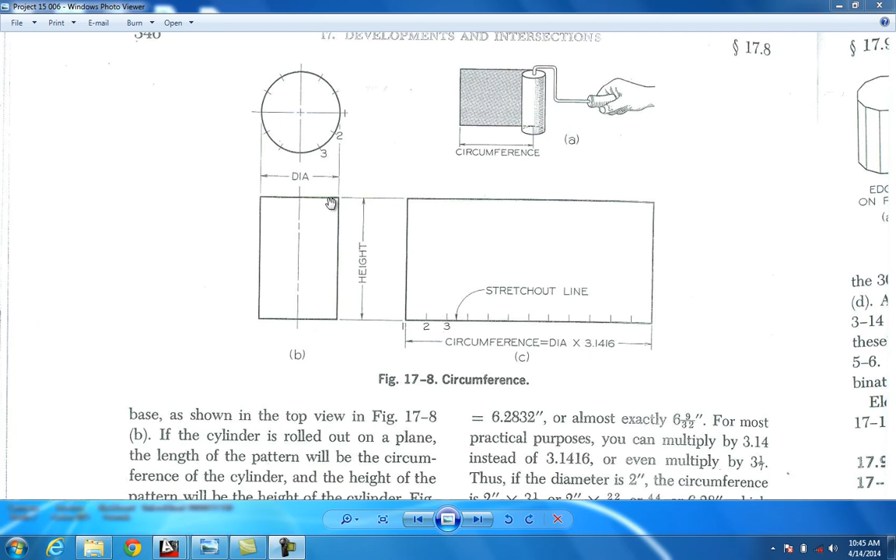But first I'd like for you to do your reading, on page 346. This is what I attached, the weekly task list, and I want you to open this up. There are several different pages to this, and I want you to read all of them because it's very helpful. Now our first project is going to deal with this little cylinder, and it's real simple.

This is the can, this is the top, this is the front side of it, and over here, for the right side, we're going to do a stretch out. When I do this in class, I always let the students print this out so they can actually roll it up and make it work, and see it turn into a can. It's pretty neat, but you can still do this wherever you're at if you have a printer. Let me show you how this is done.

The only thing you're doing is taking your diameter and timesing it by pi, and that gives you your circumference. So you want to know what the exact length of this circumference is all the way around, and that's what gives you your stretch out. So it's circumference equals diameter times 3.1416, which is pi. It gives you this length, and you're able to find that stretch out.

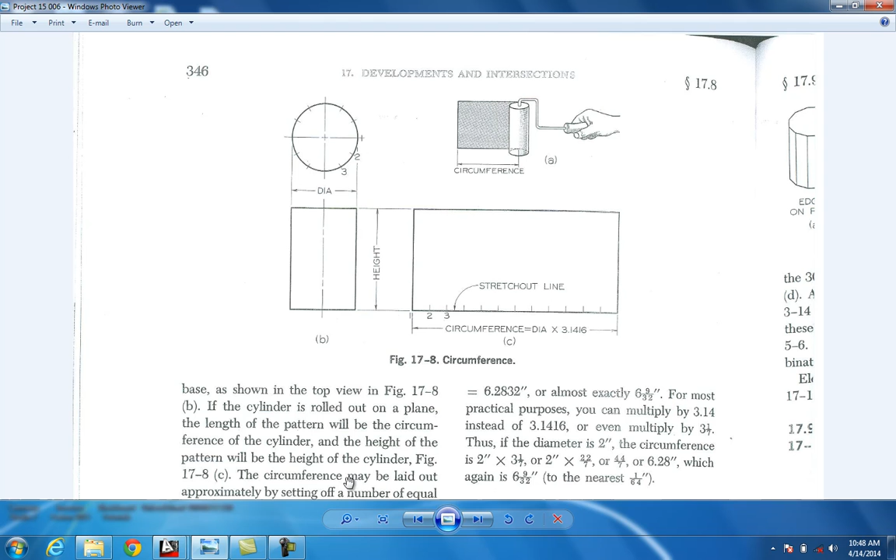So I'm going to draw this up for you. Again, this is my little can, a little cylinder, and real quick I'm going to find what my diameter is of this. It's a 3-inch diameter. And if you want to know the circumference, of course there's the formula, diameter times pi, but you can also look in your properties, and it should have it in here as well.

Got to choose it first. You come down here and there's circumference, 9.4248. And if I were to go into a calculator and do the little formula, 3 diameter times pi, which is 3.1416, I get 9.4248, and that's exactly what you have on the circumference here.

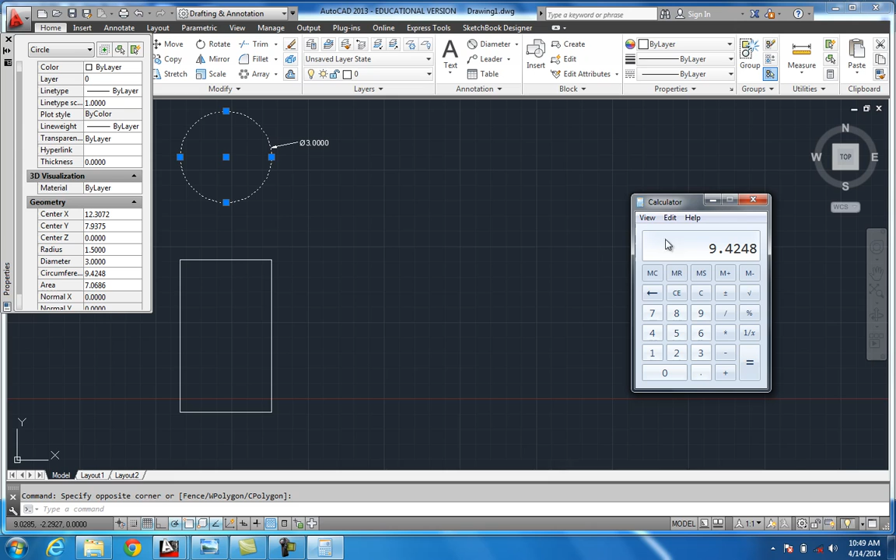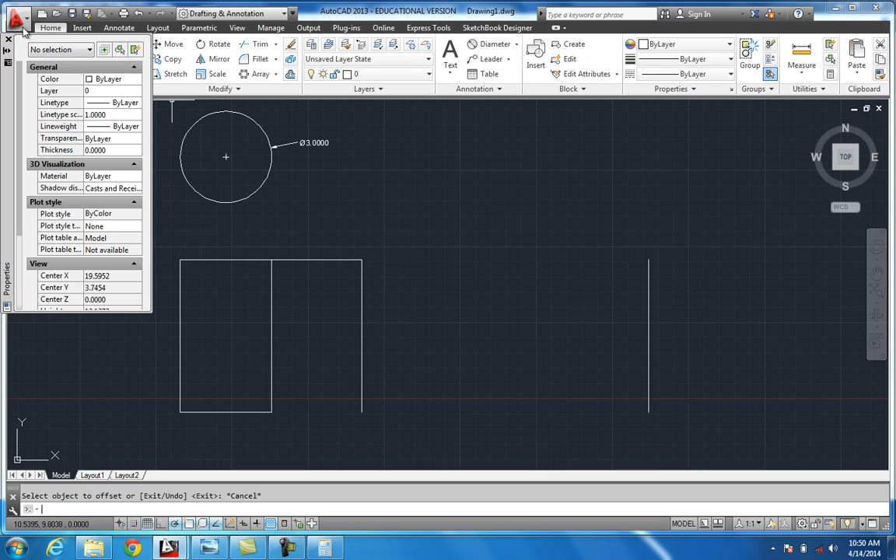So you can do it with a calculator, but if you're in CAD, you can just use technology, use what you got. I'd swing over here, take off about right there, and come on, bring it down here first. I'd open up my circumference here, look at that. Use an offset of 9.4248, enter. Offset, and it should still be, the number still should be in there. Grab that, and then again right there is your stretch out.

Alright, I'm going to do an array on this, modify tools, here's my arrays. Polar array, I'll grab that. Grab the center of this, and this is 6 times. That's fine with me. So you got 6 points coming around through here, and you can label them however you want, 1, 2, 3, 4, as long as you keep up with it.

Now I'll come down here as well. Providing if you make this one number 1, it comes down to right there. So this right here would be number 1, 2, 3, 4. This would be number 4 over here. So of course, if you do it in that order, I'm just going to put a text on here real quick and call this one number 1.

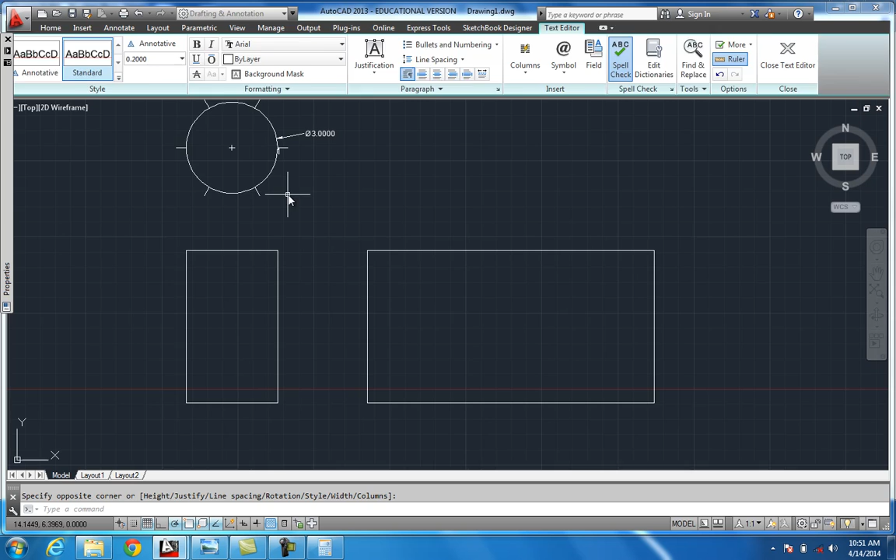That one's number 1, and of course we come around through here. This would be number 2, that would be number 3, number 4, and so on, all the way to 5 and 6. So this one will be number 2, this one will be number 3, and this one will be number 4.

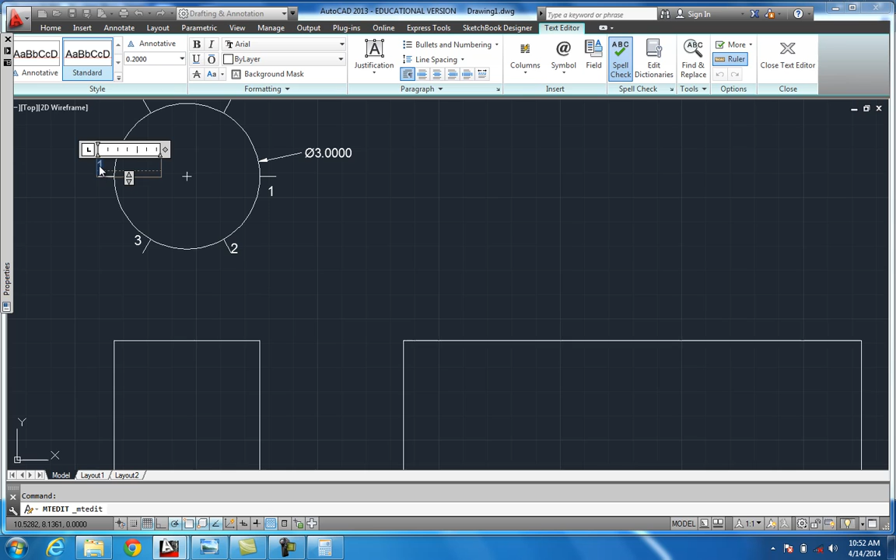I just want to show you that this line straight down here is the same as number 1 right there, when it projects down. Also number 4, when you project it down, it's going to be on this side. So when this thing rolls over to the right side view, number 1 is going to be right here.

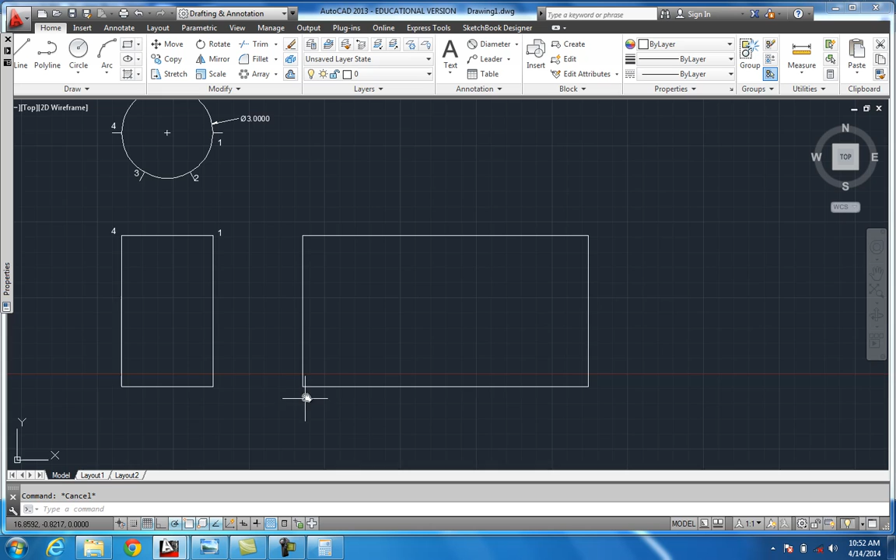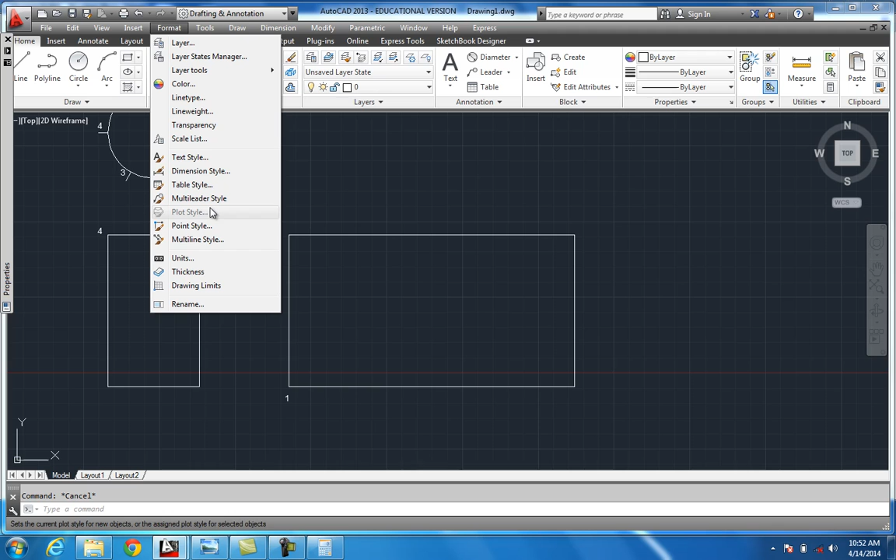So again, this will start out with number 1 right at this point. Now we just got to come in here and divide this thing up. The best way to divide a line is to come up here to format, show menu bar, go to format, go to point style. I'll choose one of these points, use this one, it'll be fine. Set absolute to screen at 0.125.

Now I'm just going to test it, and that's what my point looks like. It looks pretty good, doesn't it? Alright, delete that off, and then come back to draw, there's a divide tool on here, right there it is. Just click on it, come down and click your line you want to divide, right click to enter. Oh, I forgot to put the number of segments. I'm going to have 6 segments. Enter, and of course there's 2, 3, 4, 5, 6.

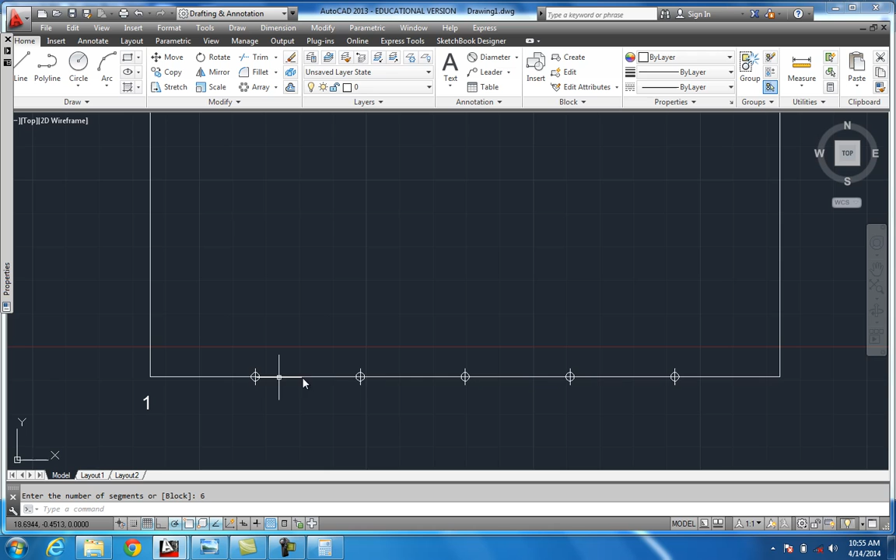So click on this, I want to do a copy, grab it, bring it down here. This would be number 2, this one would be number 3, and of course this would be number 4 over here, and so on. You're starting to get the idea of how it works at this point, and it'll go all the way down here to 5 and 6.

And this right here follows. If you were to come over here and do a miter line, you'd be able to easily get these to mesh right up where you want to be at. They'll fall right exactly where you need them. And then you could bring these down here too. The line right here would be number 2 and 3 right there, and so on.

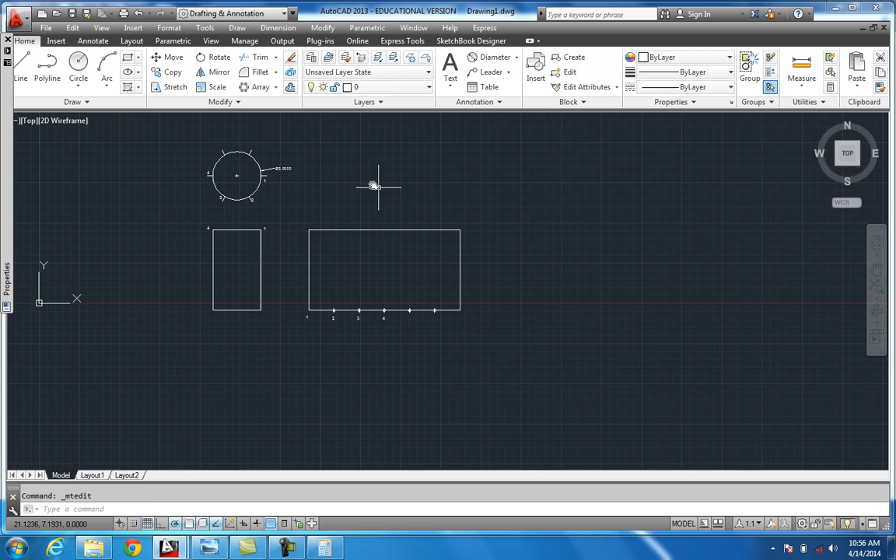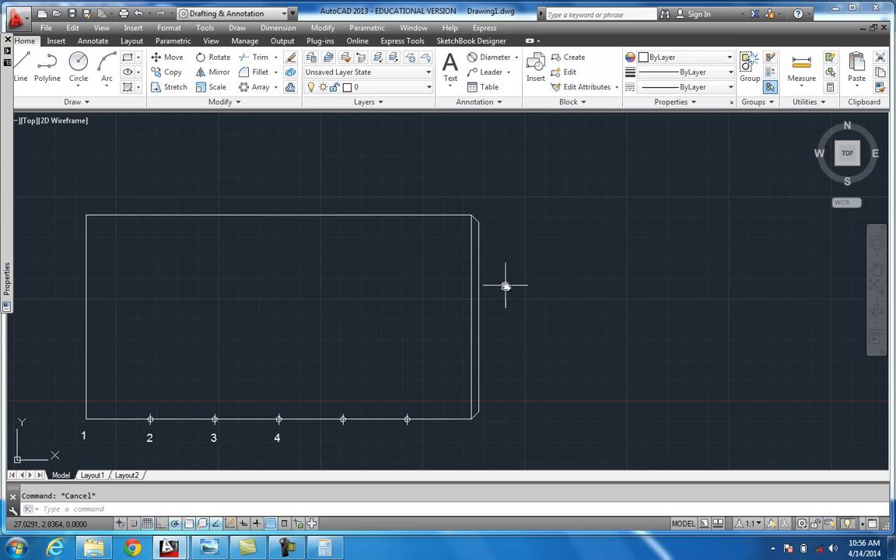Also, come over here, we gotta have a way to seam this thing up. So I'm just going to mirror that, catch the center of it, mirror that in, bring that down here. I'll get rid of this line, and just make one solid line out of it. That way we don't have any duplicates. There's my seam, that way I can take and glue it together, or however they seam these cans up with.

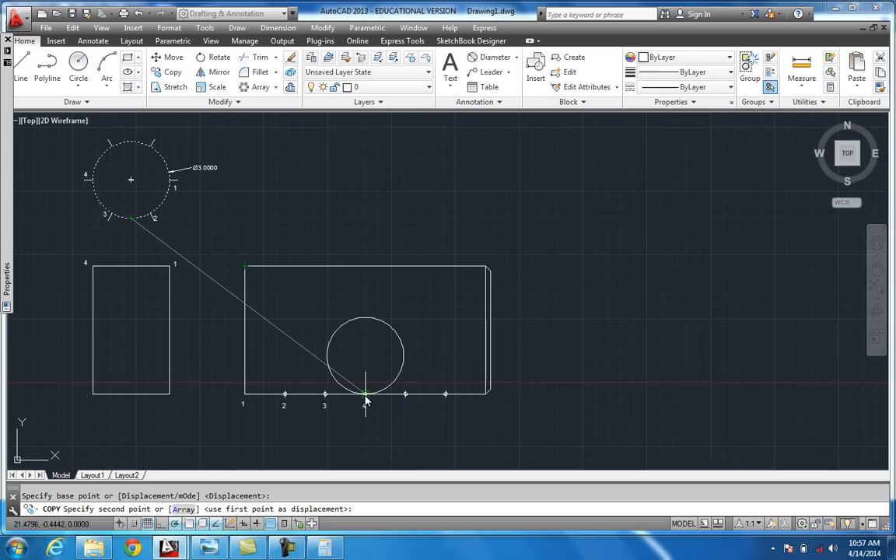Now also I want to take this right here, just like that, do a copy, because I need a top of my lid, and I want to come in here and put it right at number... I can put it at number 1, or right in the center. I'm just going to put it right at number 4, and that should be pretty close to the center of it.

And of course, to seam this one up, you're going to have things that's kind of... you can read it, this is in your book, how to seam things. But I want to put something on there similar to... I'm just going to guesstimate on this one. I'll put me a straight line in here, and I'll just mirror that across. Enter.

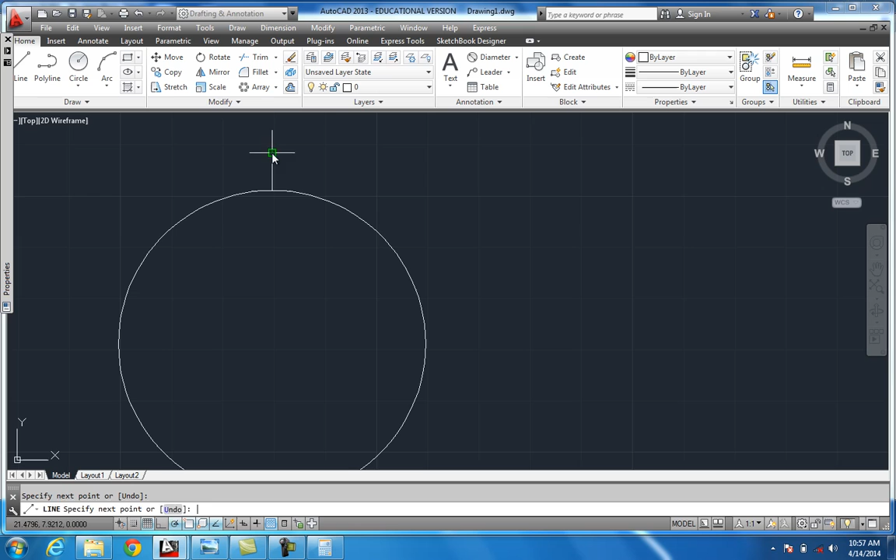Probably would've been better off if I'd done this: line, went from the center of it, shot me a line straight up. Put me a line in, something like that, down to somewhere in there. Trim. And then just done a mirror on that. Enter, trim all this up.

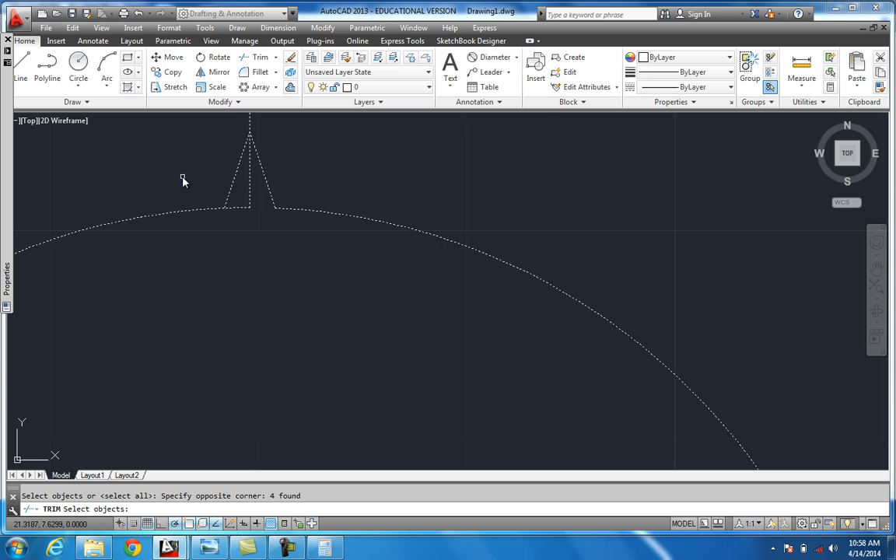And then just take that, and that's going to be what seals the deal for me. Grab this and then do an array. Catch the center of this, and for items, let's put in there about 100 of them. See what that looks like. Way too many, let's do 98... I mean 90, getting closer.

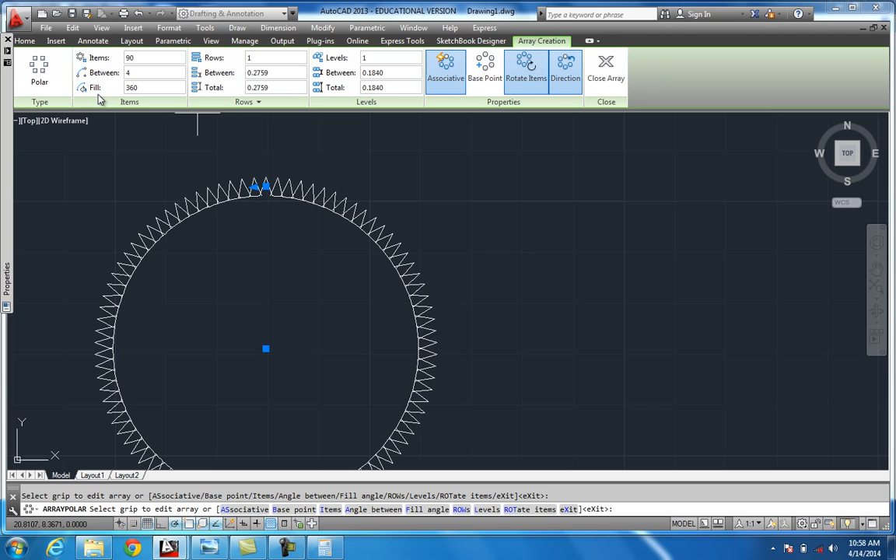We're just doing a guessing game right now. 60, oh we're getting closer. 70, that looks pretty good. Then you can kind of fine tune it to get them exactly what you want. 75 looks pretty good.

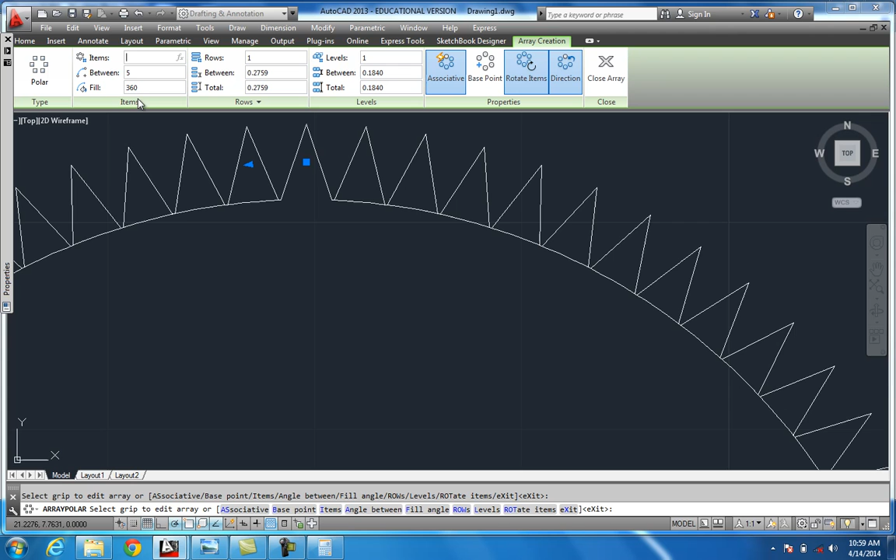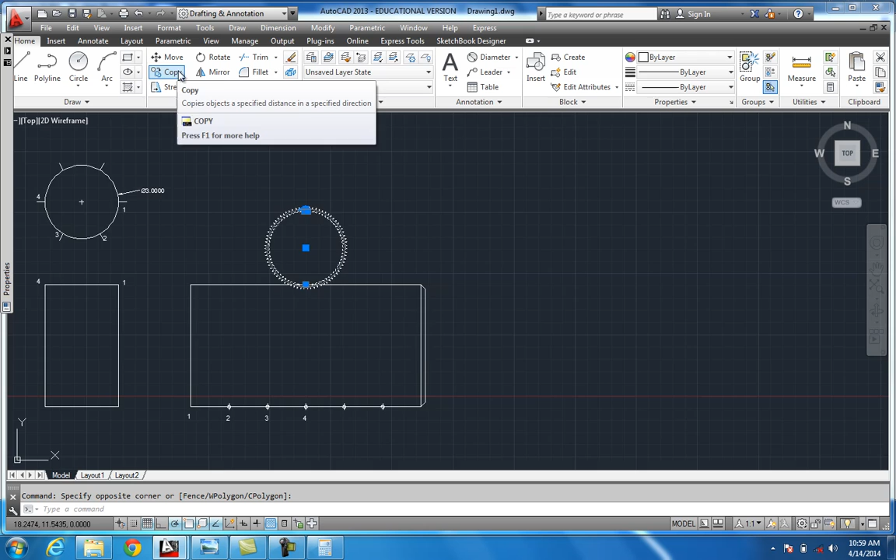And that way at this point, all you're going to do is take in, this would be what's going to fold into it, and you're going to glue those little seams on, and you'll see that in your book. So I'll grab this whole thing, and then I'll do a copy, come up here.

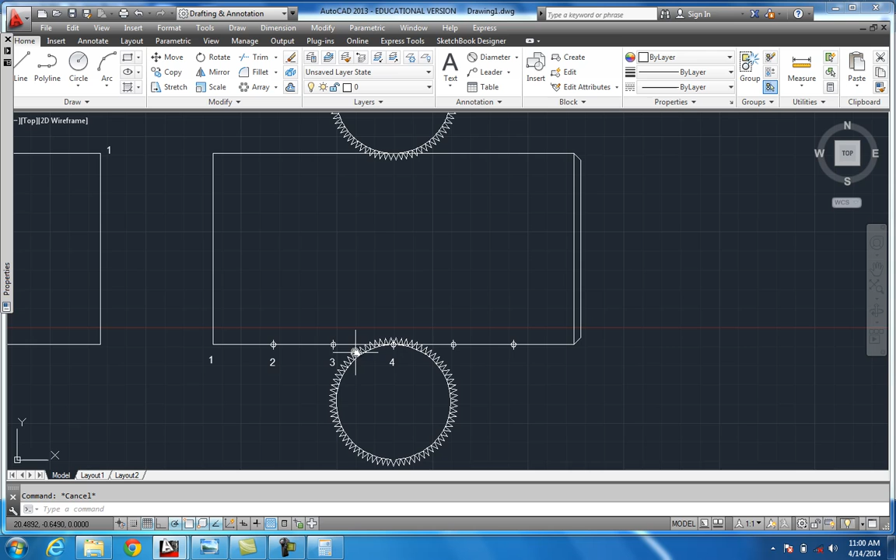I'm just going to take and mirror this, get you right in the dead center, bring it over. That way, there's my little seams, and it should be right on that arc right there, on that radius. Now, when you were to print this off of a piece of paper, all you have to do is take and cut this out. Of course, these would be pretty tough to cut out, but you can make them more coarse than what I did. And you can put a little glue on that, glue on your seam, and roll those up, and you'll have a perfect little can.